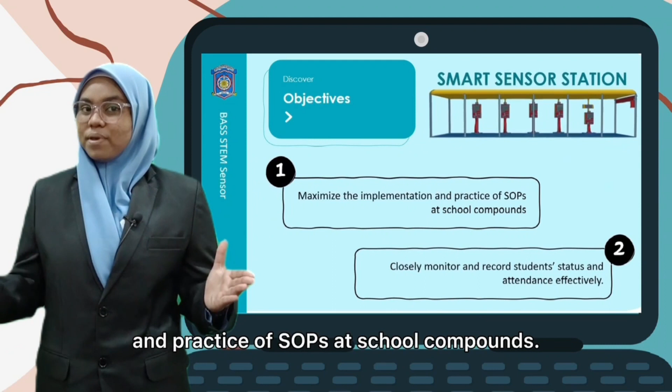Based on the problems mentioned, we are presenting our Smart Sensor Station. This Sensors Innovation Project aims to, first, maximize the implementation and practice of SOPs at school compounds, and second, closely monitor and record student status and attendance effectively. This project is determined to solve problems related to SOPs implementation and time consumed per day throughout the screening process, in order to reduce the spread of COVID-19 in school.

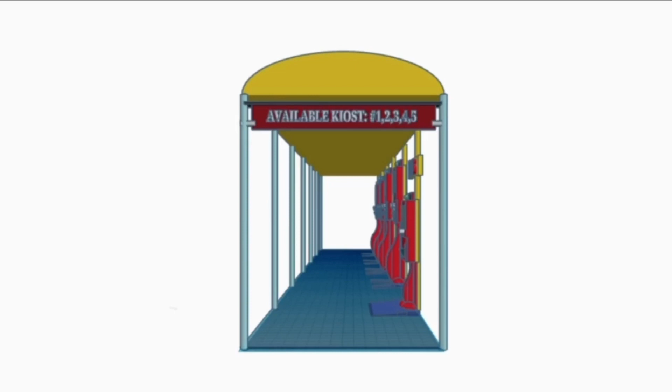Let us see how these components in the Smart Sensor Station are interconnected. Our Smart Sensor Station consists of 5 identical kiosks. One kiosk is designated for disabled or needy students, designed with a suitable height and larger space. An empty kiosk guidance display is provided so students can easily identify any available kiosk. Since the kiosks are aligned in parallel, this feature will definitely help them the most.

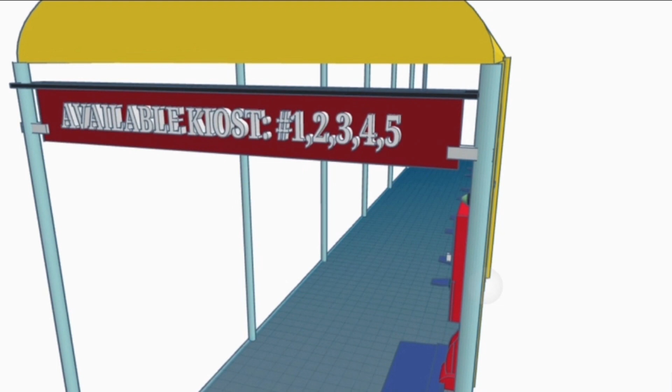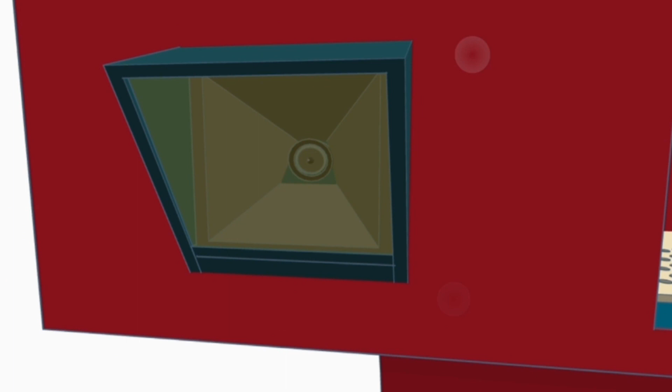A quick tour of the features of this kiosk. On the lower part of the kiosk, a sensing system is attached using an ultrasonic sensor device, which acts to read pupils' presence there. A QR scanner device functions as a QR code scanner to record students' data and to keep track of students' body temperature each day.

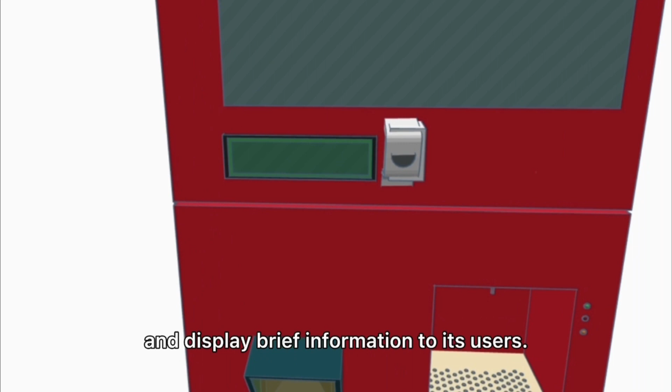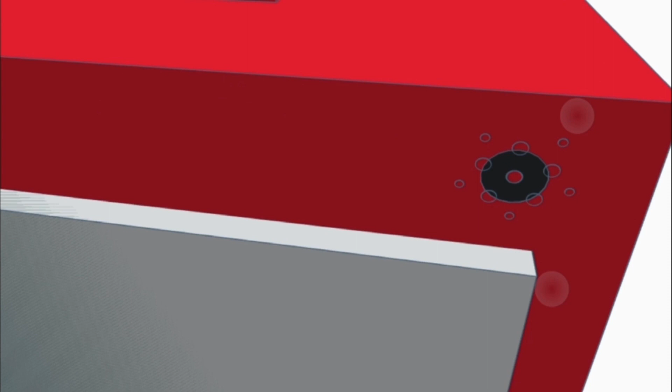A contactless temperature sensor is attached together with an LCD display. It is able to scan body temperature without contact and display brief information to its users. The built-in buzzer will ring when a student's body temperature exceeds the limit. An LED RGB is set with 2 colors, green and orange, giving a signal whether the kiosk is occupied or not.

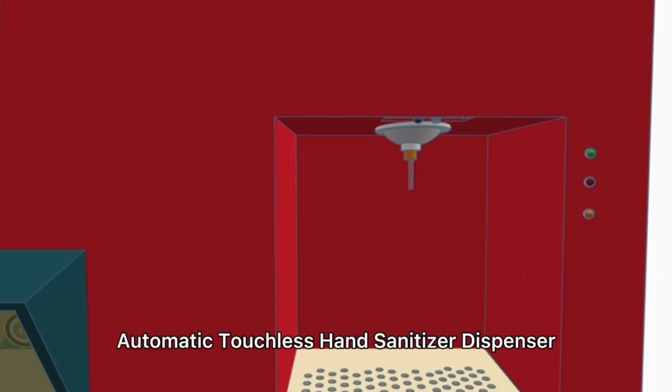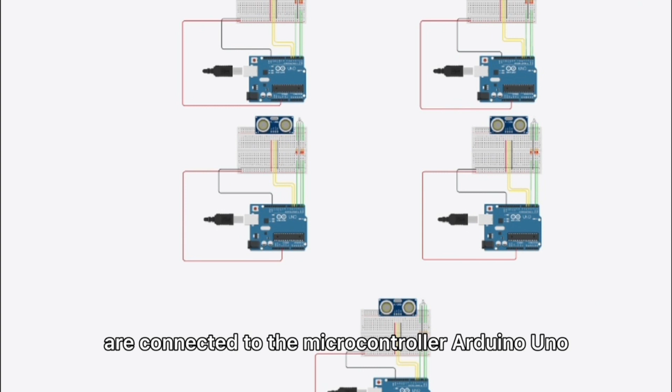This is the automatic touchless hand sanitizer dispenser equipped with green, red, and orange LED, which will light up according to its own arrangement. 5 ultrasonic sensors, 5-unit RGBs and LCD display devices are connected to the microcontroller Arduino Uno and given a 5-volt power supply.

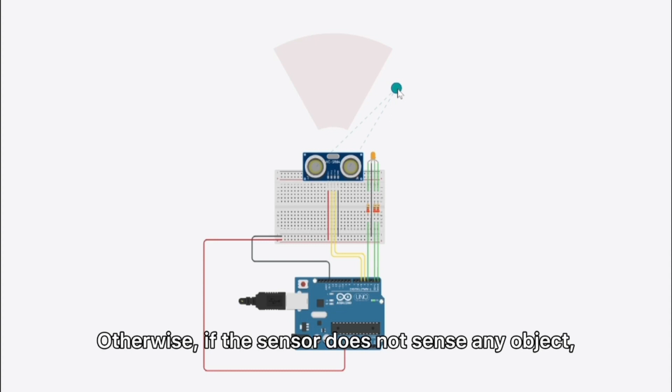If there is an object being scanned by the input sensor, a signal will be sent to the output RGB. Orange light will be emitted and the output display will make its calculation. Otherwise, if the sensor does not sense any object, the output RGB will remain green and the output display will do the calculation.

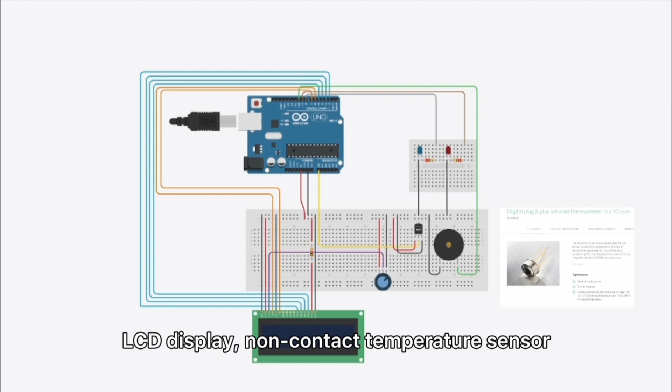In this simulation, LCD display non-contact temperature sensor MLX90614 non-contact infrared temperature sensor, blue and red LED together with an output buzzer piezo are needed. We use the TMP36 temperature sensor to demonstrate this simulation.

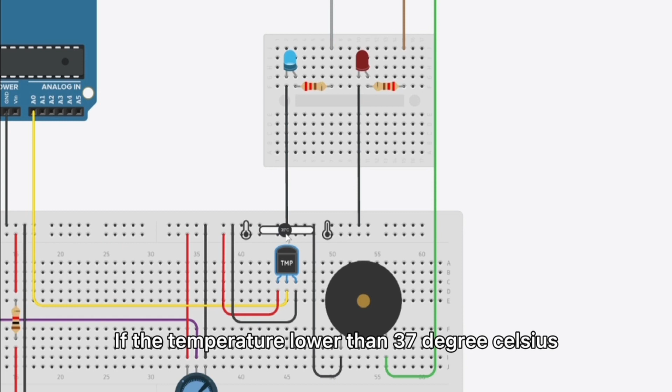If the temperature lower than 37 degrees Celsius is detected, the blue LED will light up. Otherwise, if the temperature exceeds 37 degrees Celsius, red LED will light up and the buzzer will ring.

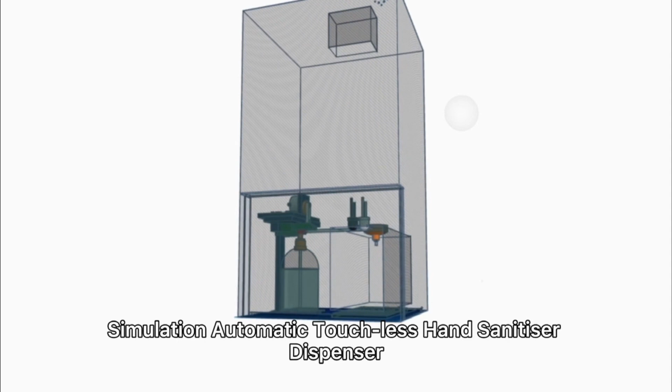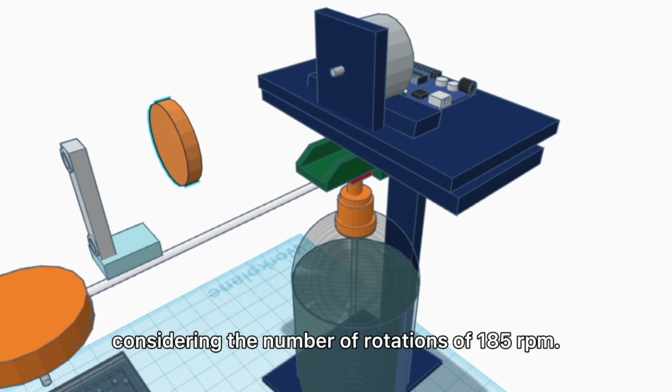Simulation of the automatic touchless hand sanitizer dispenser needs an IR sensor, Arduino Uno, and DC motor connected to a 5-volt power supply. When the IR sensor detects an object, LED turns on and the DC motor does about 1 turn of motion, considering the number of rotations of 185 RPM.

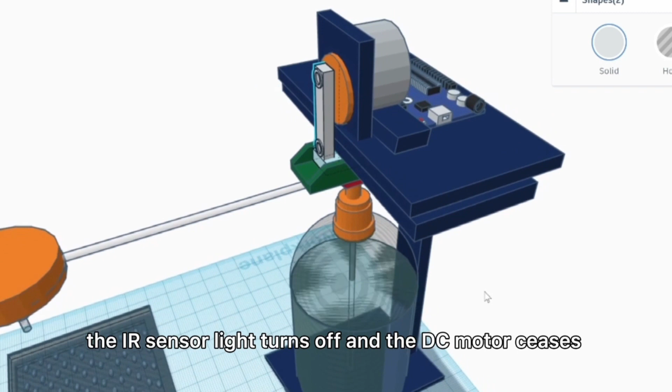With the motor's running power, the hammer moves vertically once and presses the pump handle of the disinfectant container. When the IR sensor no longer detects an object, the IR sensor light turns off and the DC motor ceases operation.

In order to make this project function well, we divide it into 3 stages. Every stage has its own simulation and acts in different situations. Let's start with the very first stage, which refers to the situation of students queuing at the kiosk.

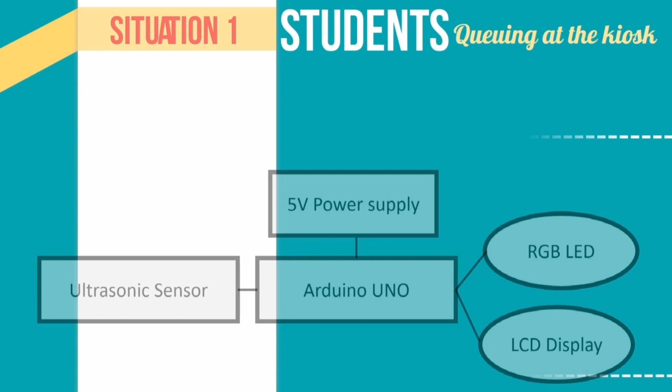We use an ultrasonic sensor as an input, Arduino Uno as the microcontroller, and RGB LED with LCD display as an output.

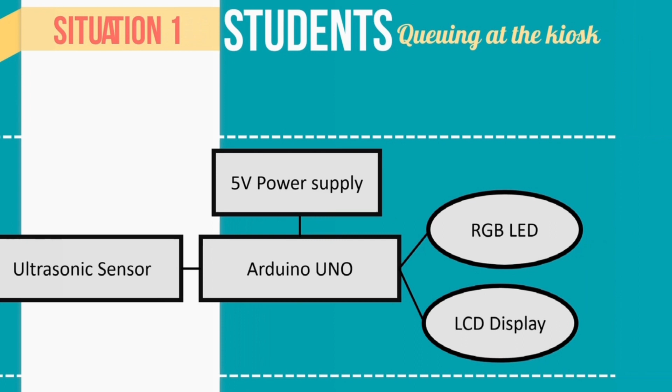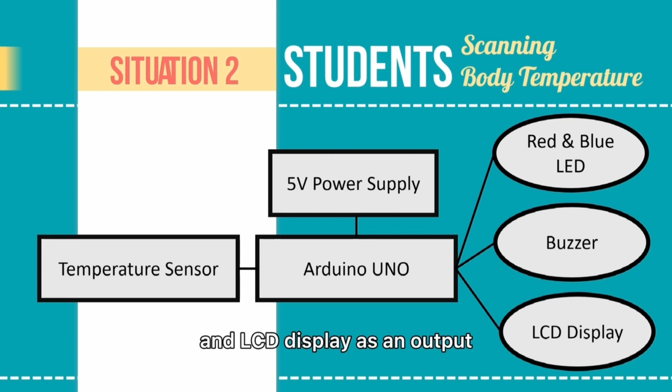The second simulation refers to the situation of students scanning their body temperature. We use a temperature sensor as an input, Arduino Uno as a microcontroller, and LCD display as an output together with blue and red LED.

The third simulation refers to the situation of students using hand sanitizer. We need an IR sensor as an input device, Arduino Uno as a microcontroller, and LED with DC motor as an output device.

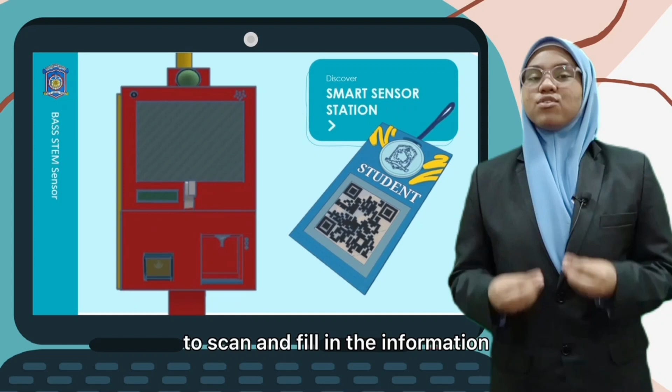In conclusion, the Smart Sensor Station is well equipped with hand sanitizer and temperature screener for the health screening process. Based on this objective, we included a QR code for students to scan and fill in their information while the teachers will automatically receive the data.

This project is expected to solve the congestion problem during peak hours due to the vast number of students entering the school gate. Moreover, it is also expected to solve the sanitizing process before students enter the school by physically touching the dispenser, which can create a greater risk of infection.

The Smart Sensor Station is designed and simulated on Tinkercad for 2 weeks. From this project, we hope people can benefit a lot from this, not only at school but also in public places. We also hope people can have positive feedback, especially teachers.

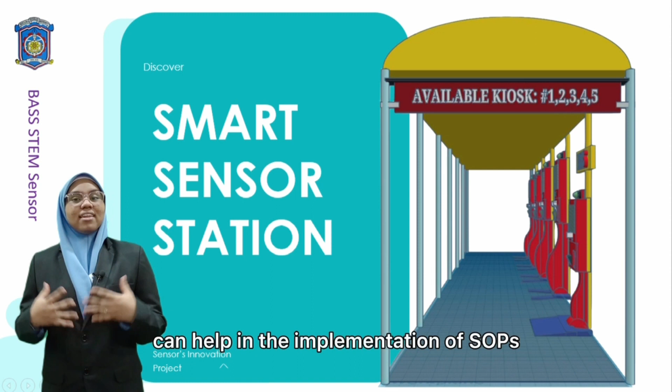Because with this Smart Sensor Station, it will make it easy and convenient for them to record the students' attendance and identify who are absent. It would also be appreciated if this project can be prototyped for greater use in the future. Last but not least, we hope that this project can help in the implementation of SOPs to reduce the spread

of the COVID-19 virus during this pandemic era as a whole, especially in schools.